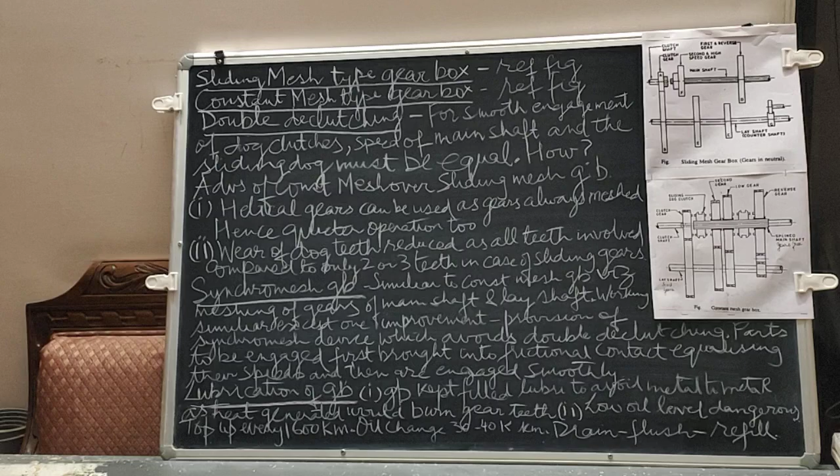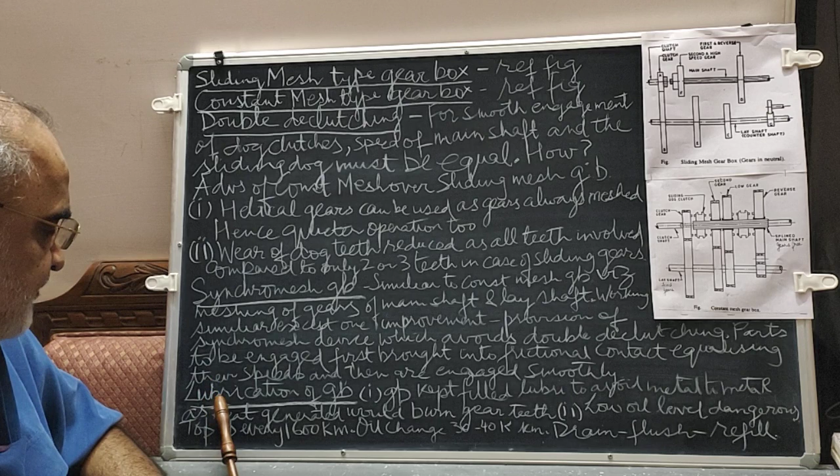Now we come to the type of gearboxes. These are sliding mesh type gearbox, constant mesh type gearbox, we understand double declutching associated with constant mesh. Then we will also see the latest, which is now being done, made and fitted, Synchromesh gearbox. And finally we see the lubrication and care of the gearbox.

Now sliding mesh type of gearbox shown here is the simplest type. Now we are inside the gearbox. There will always be two shafts. If you have seen an open gearbox in a workshop on the roadside, the top one will be the main shaft and the lower one will be called the lay shaft, or even some call it the counter shaft.

Now the gears with various sizes, number of teeth - this is important, which you will study later. Number of teeth, that's why the sizes are different. These gears are fixed onto the lay shaft. Two gears are mounted on the main shaft. The main shaft is splined, and therefore these two gears are free to slide on the main shaft.

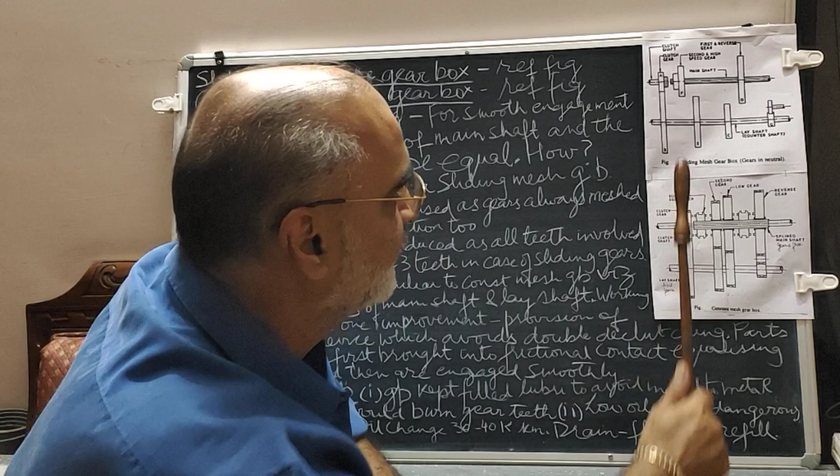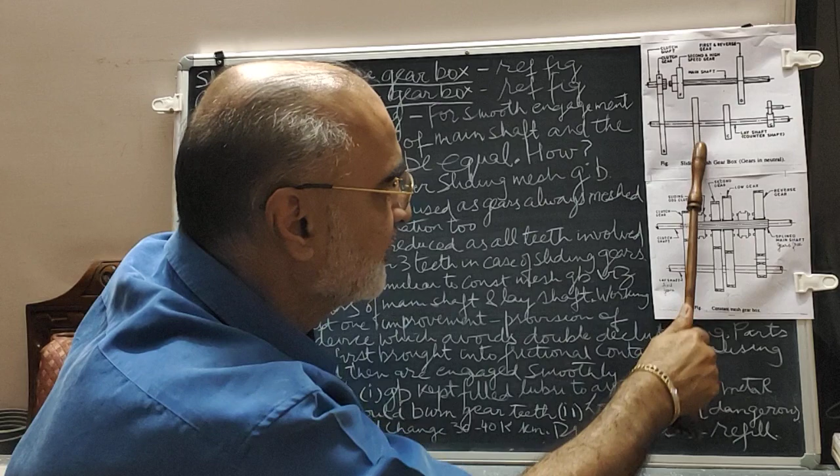Now we want to shift to second gear. We will press the clutch, disengage this and put it in second gear. What do we do in second gear? The gear lever mechanism will shift this gear on the splines and come in contact with this gear. How will be the power flow? From here, here, here, here and out of the gearbox.

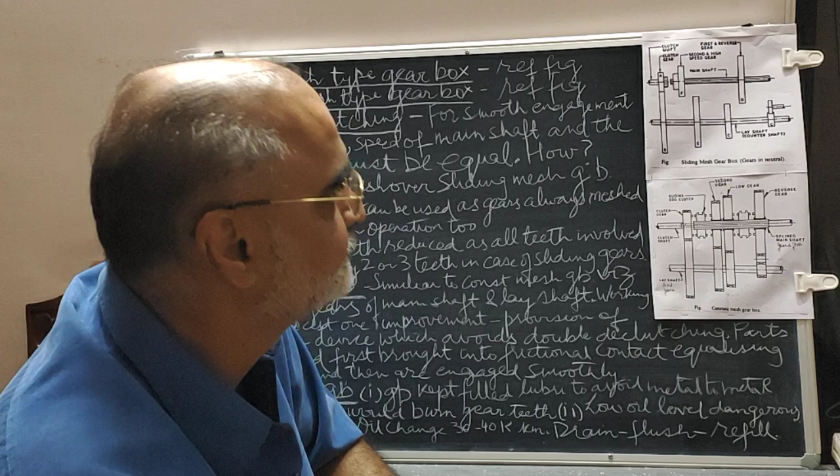Top gear, third gear or top gear. Press the clutch, remove this, and the clutch selector mechanism shifts this gear into the clutch gear. This is internally splined, this is internally splined also, and the drive is direct drive, which is the top gear. Direct drive - although this continues rotating, as I said, the drive will be this, there is no drive from here, and the drive will be straight.

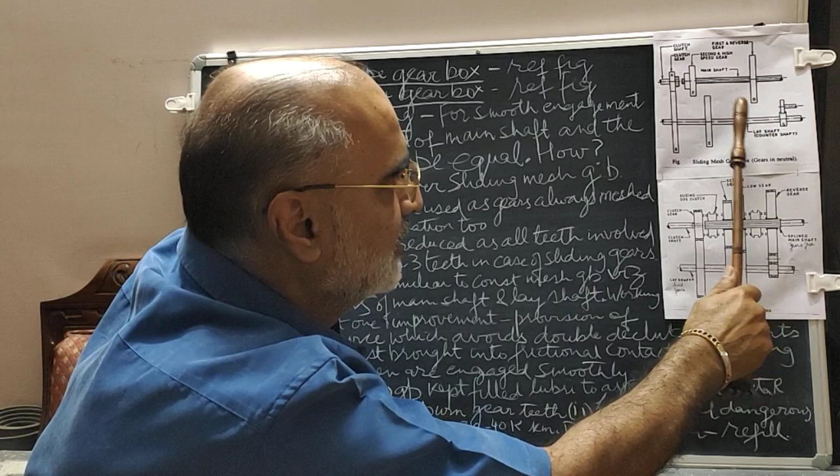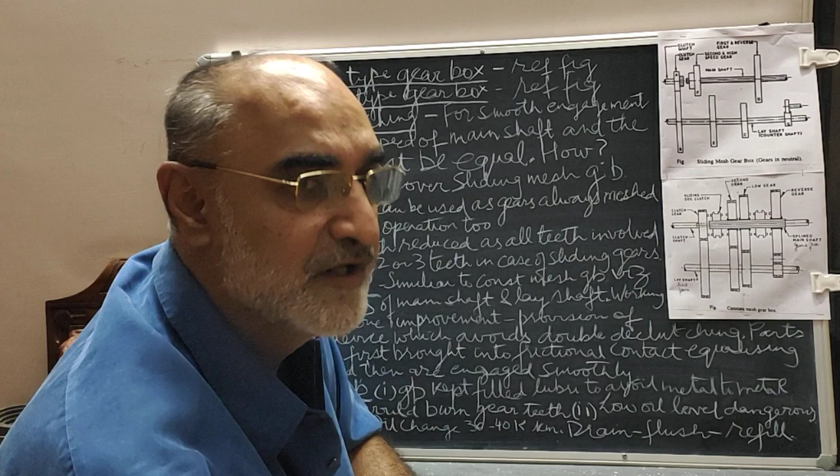Now what about the reverse? We have to move the vehicle in reverse also. For reverse, this is the first and reverse gear, shifted to the right. The difference is that between this gear and this gear there is an idler gear. The idler gear, what is the purpose of the idler gear? It is to turn the direction of rotation. If it was going clockwise, the idler gear will make it turn anti-clockwise. Earlier semesters must have learned to turn the rotation - you put an idler, it will rotate.

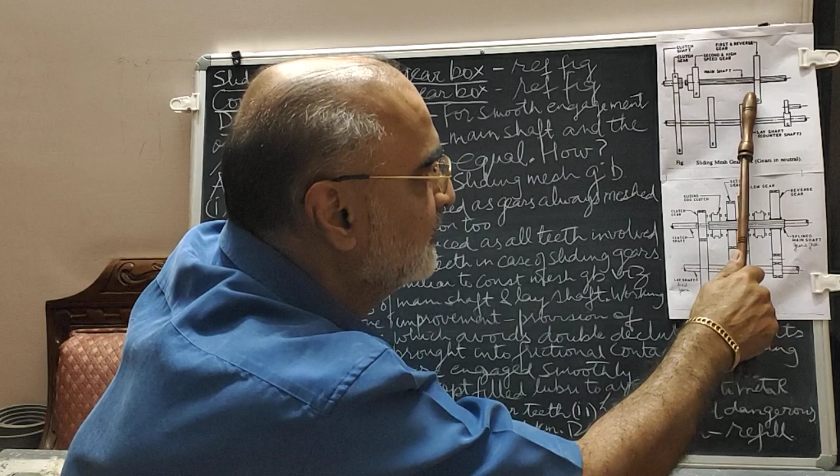So what will be the power flow? It comes from here, through the idler gear. This will reverse the direction of the main shaft, and the main shaft, instead of clockwise, will start rotating anti-clockwise, and the vehicle will move backwards.

What moves? The main shaft is for the movement of these sliding dog clutches. Now there are two sliding dog clutches - if you have 3 gears, there will be 2 sliding dog clutches. Clutches are these small things which come first into frictional contact and then they contact that particular gear. So the gear shifter mechanism is fitted onto these, and when you shift it, only this moves left. These don't move, these are fixed to the gears below. This will move left or right, this will move left or right.

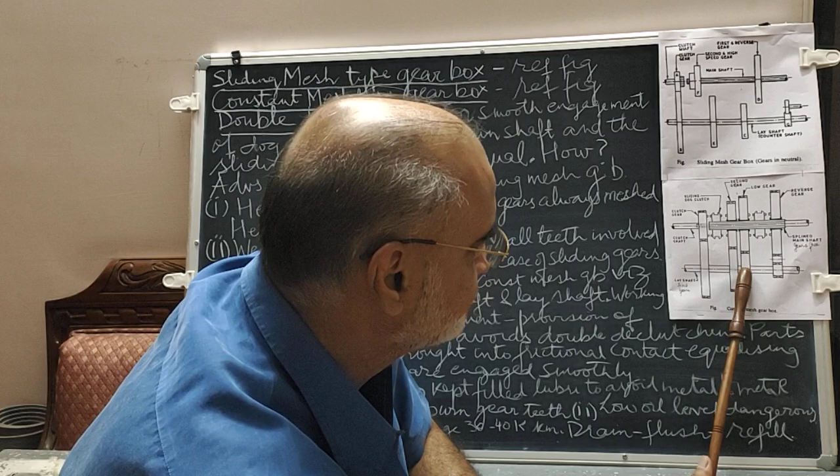Now let us look at the first gear. The drive comes this way, same as that, onto the lay shaft, and for the low gear, the right dog clutch is moved left and making contact with this, and so the power will flow. Now this is the low gear, first gear.

Now we want to shift to the second gear. We press the clutch, this gets disconnected, and the gear selector mechanism - we shift the left dog clutch to the right. This contacts this, and the power flow will be - this is the second gear power flow.

For third gear, same as that. You press the clutch and then engage the gear selector mechanism to top gear. This dog clutch will be moved left, and these clutches will engage, and the drive will be direct. As in that, this will also rotate, but there will be no flow - there will be a direct flow for the top gear.

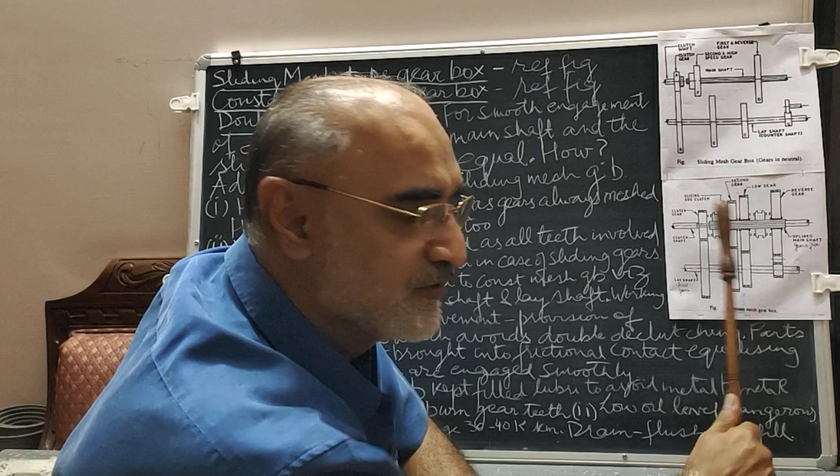For the reverse also, it is the same. This is the idler gear, and the direction and rotation of the main shaft will reverse, allowing the vehicle to move in the reverse direction.

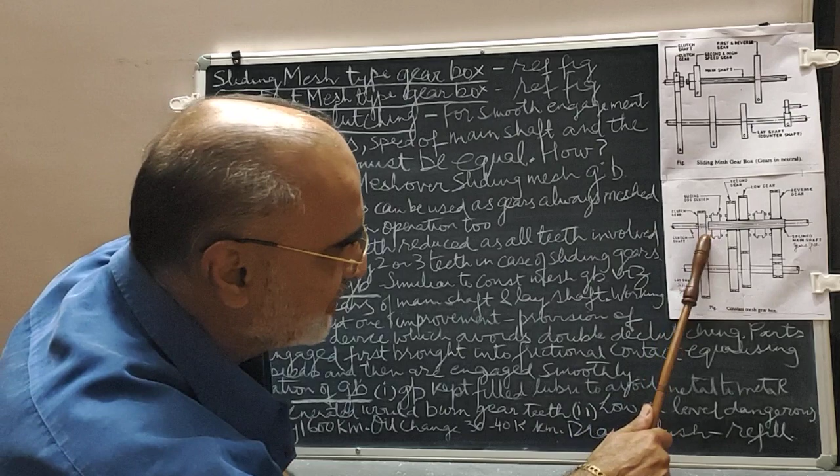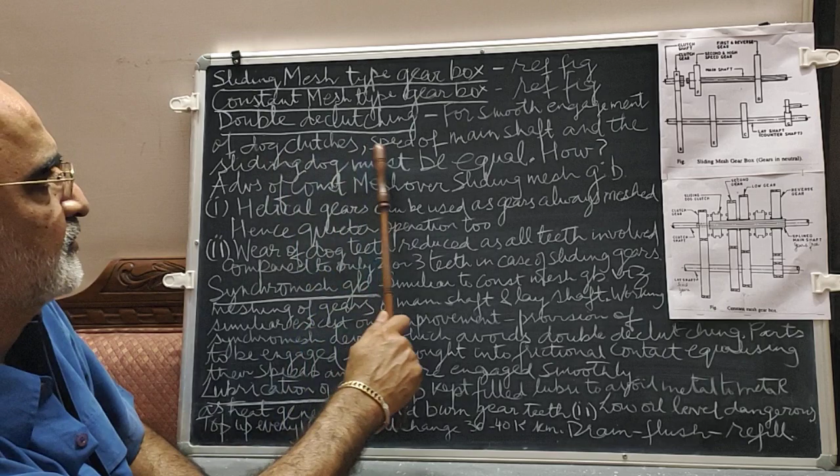Now what is double declutching? For smooth engagement of these dog clutches, we must synchronize and try to bring the speed of the main shaft and the dogs as nearly close as possible to avoid friction and noise. The speed of the main shaft and the sliding dog must be equal. So how do we do that?

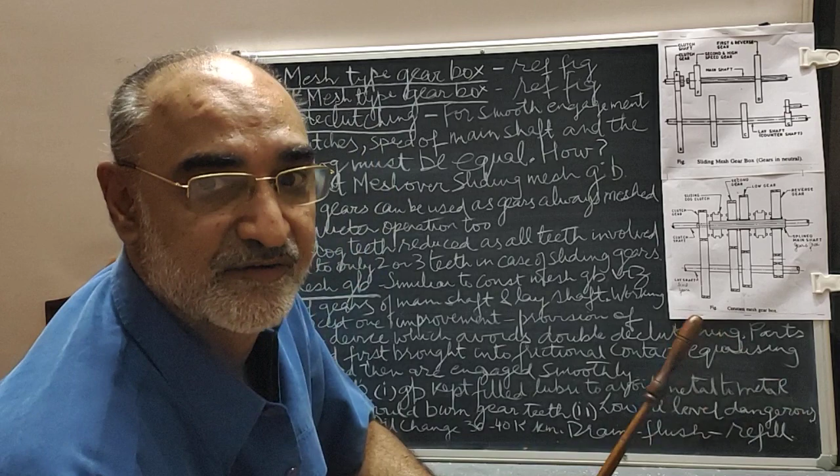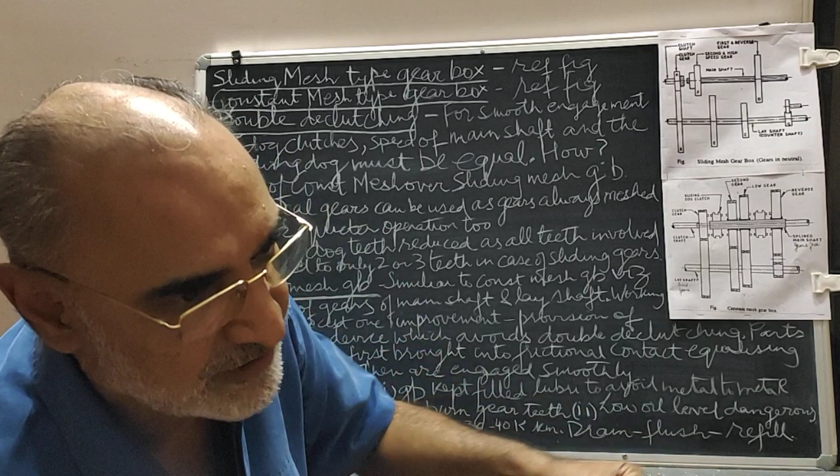We do that by double declutching. What happens is we press the clutch, bring it to neutral, press the accelerator with the right foot to increase the speed of the main shaft to that of the dog clutch, so that both can engage, and then again we engage the gear and release the clutch. This is called double declutching, so the speeds should be the same to avoid any noise or friction.

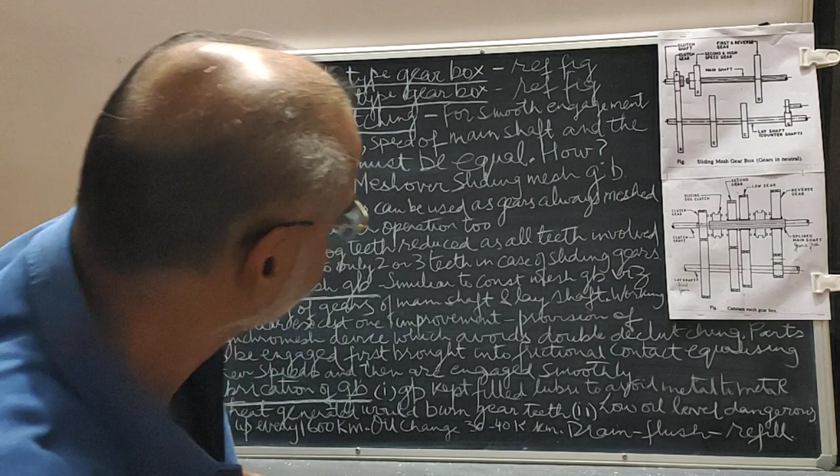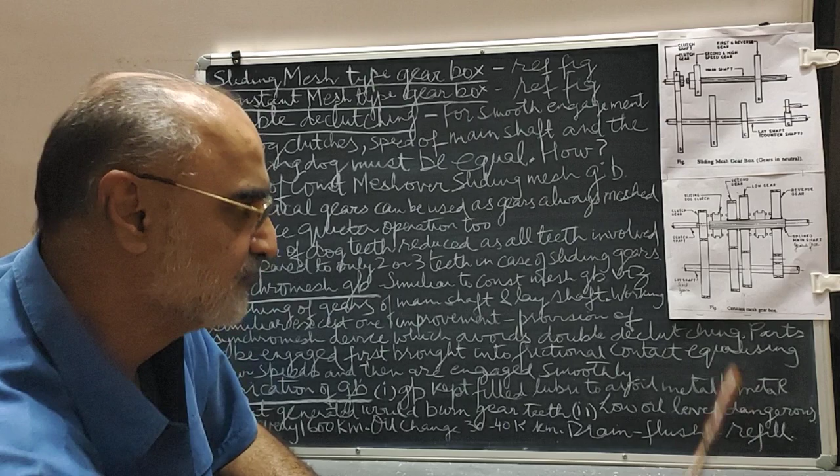Now let us look at the advantages of constant mesh sliding over the sliding mesh. This sliding mesh, I think production has stopped totally, and this is also limited quantity now. The latest is of course the Synchromesh gearbox, which is a slight improvement over this. But we must know the concepts theoretically.

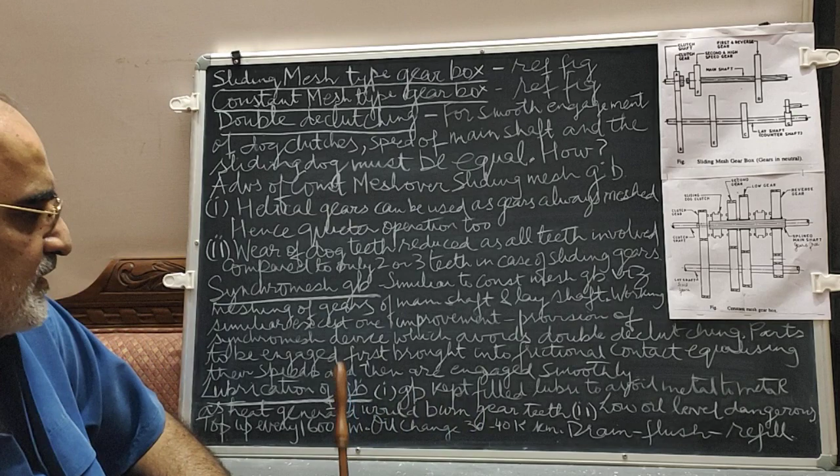So the advantages of constant mesh over sliding mesh are: first, you can use helical gears because the gears are always in mesh. As we studied in earlier semesters, helical gears are less noisy, hence quieter operation too. The wear of the dog teeth is reduced as all the teeth are involved, compared to only 2 to 3 teeth in case of sliding mesh.

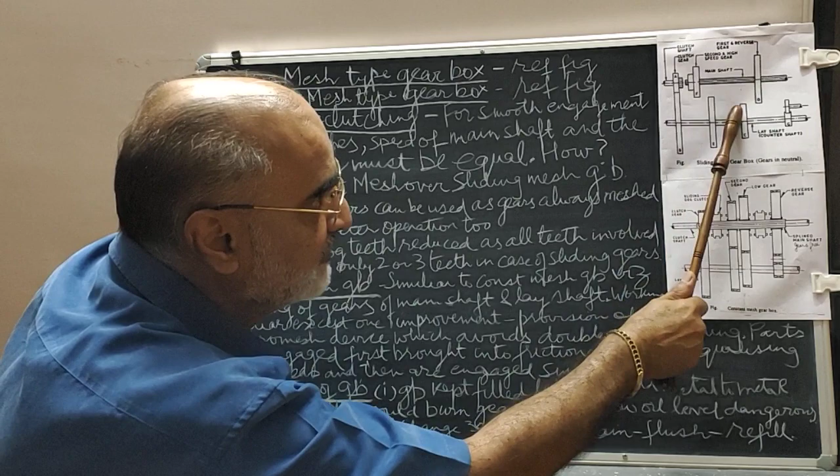In sliding mesh, only 2-3 teeth come in contact whenever you engage them. In constant mesh, these teeth are always in contact, only the dog clutches are functioning in this place. So the wear of the dog teeth is reduced as all these teeth are already meshed, resulting in less wear.

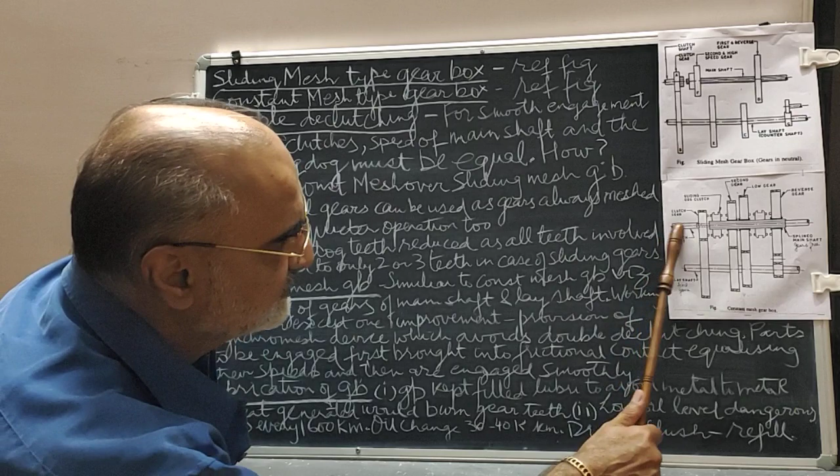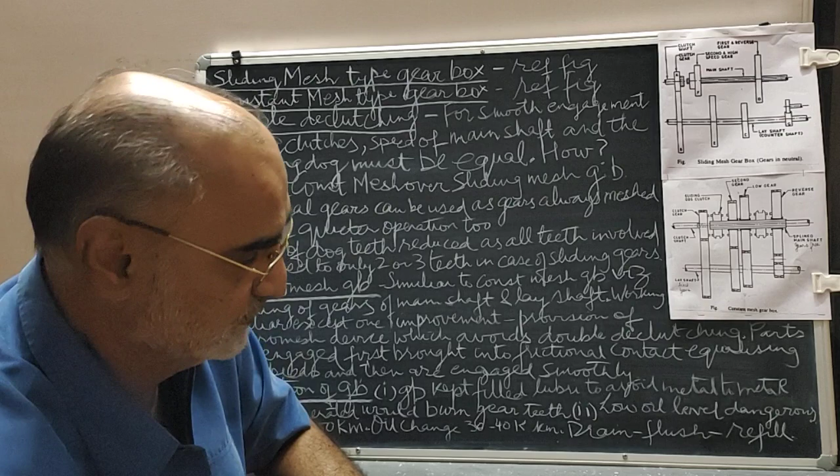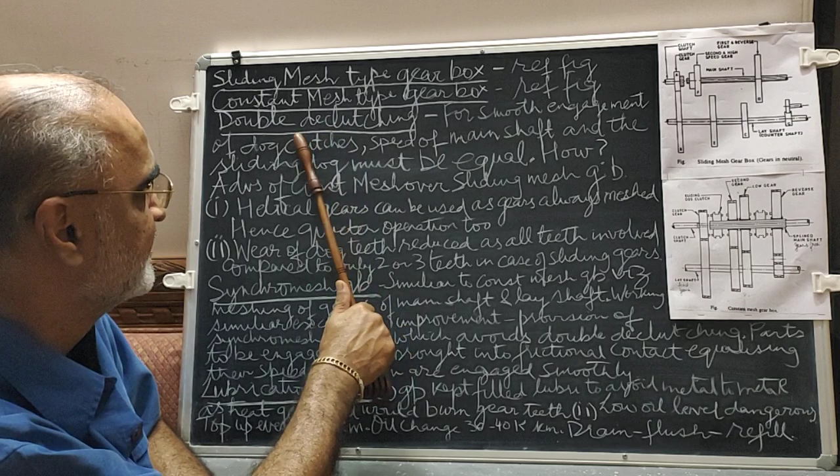Now the Synchromesh gearbox is an improvement over the constant mesh gearbox. The construction is similar, we have a main shaft which is splined, and the lay shaft and fixed gears are the same. The only addition is a Synchromesh device. What is the purpose of that device? All it does is avoid double declutching. The job which we physically do in double declutching is done by the Synchromesh device. We will study this later when we come to the detailed study of the gearbox.

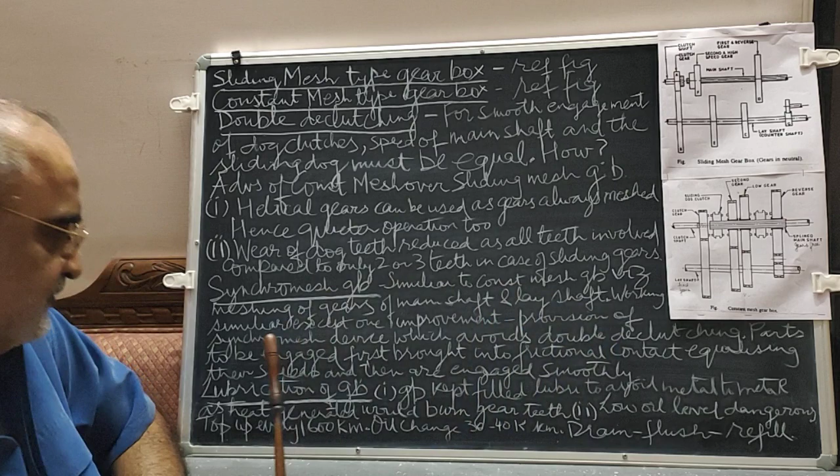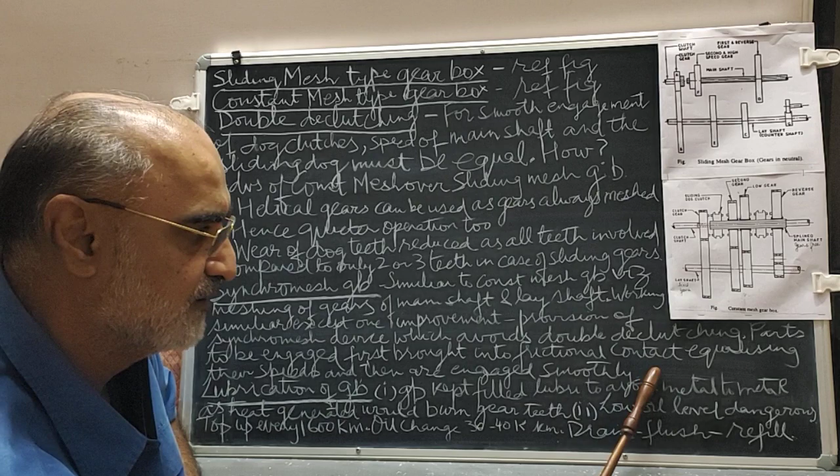Similar to the construction of the constant mesh gearbox, with meshing of gears of main shaft and lay shaft same. Working is also similar, except for one improvement: the provision of a Synchromesh device which avoids double declutching. The parts to be engaged are first brought into frictional contact, equalizing their speeds. Once speeds are equalized automatically, which we otherwise do manually in declutching, they are then engaged with the gear lever. First the Synchromesh device works, and once the speeds are matched, the gear selector mechanism, through the gear lever, engages that particular gear.

Now, lubrication of the gearbox - this is important, so let me cover some relevant points which should be known. First, the gearbox should always be kept filled with lubricant to avoid metal to metal contact.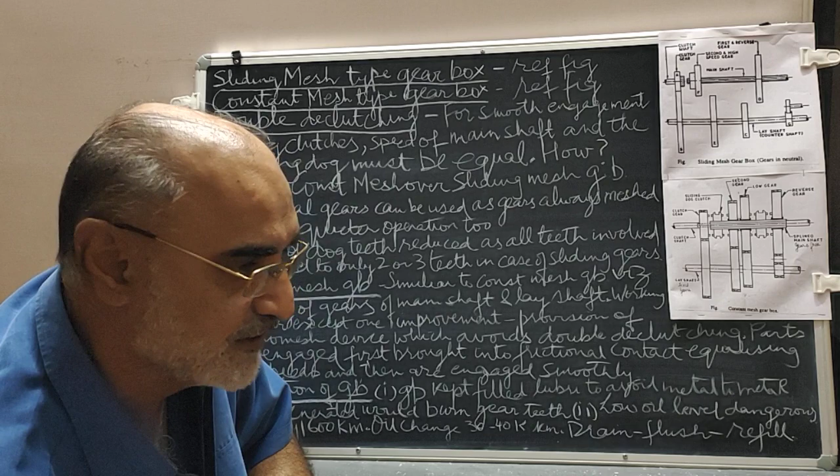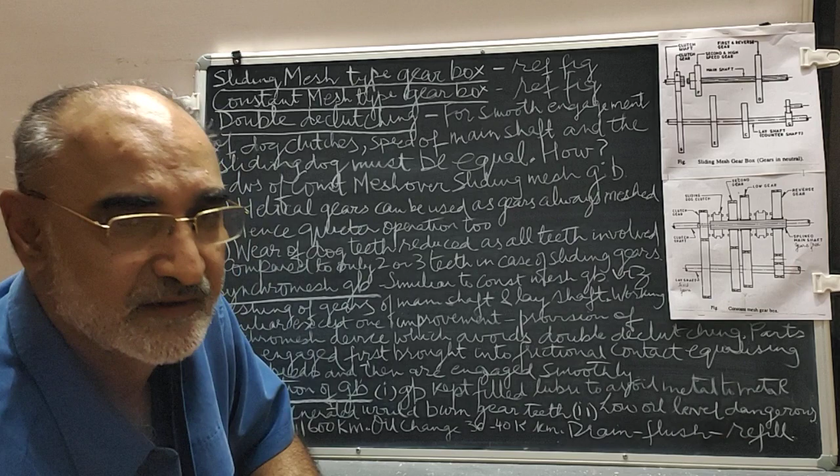Metal to metal contact - as we studied earlier, there is always a thin film between two gears when they are running because the gearbox is full, and that is the lubrication required. If that is not there, no oil, the meshing of the teeth will cause the gear teeth temperature to rise very high and the gear teeth may burn out. So, to avoid metal to metal contact, as heat generated would burn the gear teeth, even a low level is dangerous - partially it may take longer, but eventually the gear teeth will burn out.

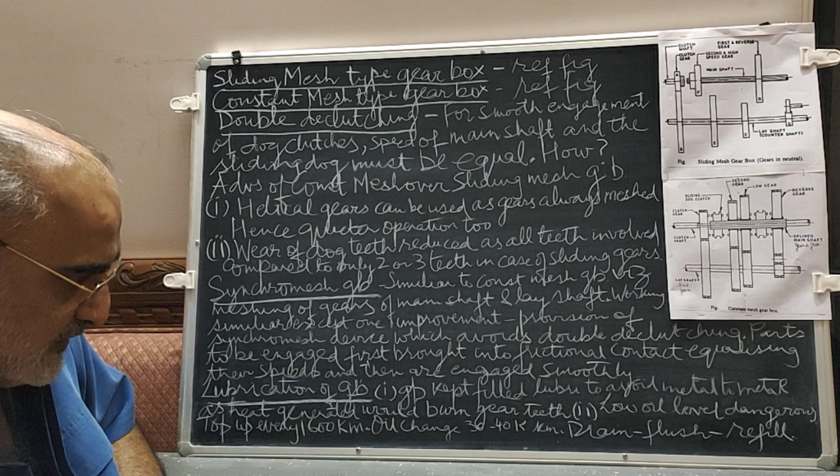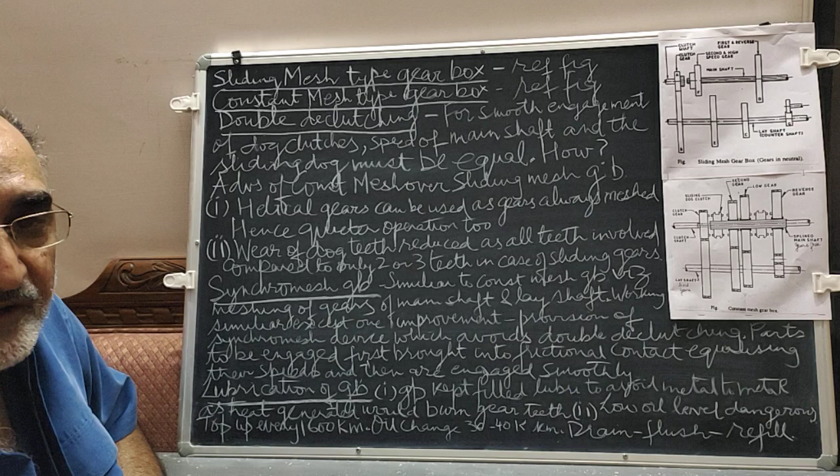So we need to top up every 1600 kilometers - this is for older vehicles, now of course kilometers have increased. Oil change must be done every 30 to 40,000 kilometers. Nowadays in modern cars, it's anything around 60 to 80,000 kilometers. In some cars, like my car, a Ford Fiesta, they say there is no need to change the gearbox oil at all during the entire service life, unless there is a problem, then only the gearbox is opened and the oil changed. Otherwise, no need.

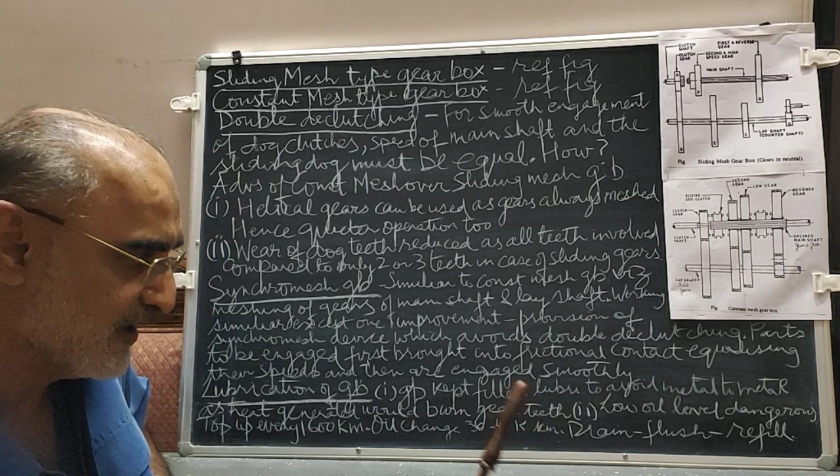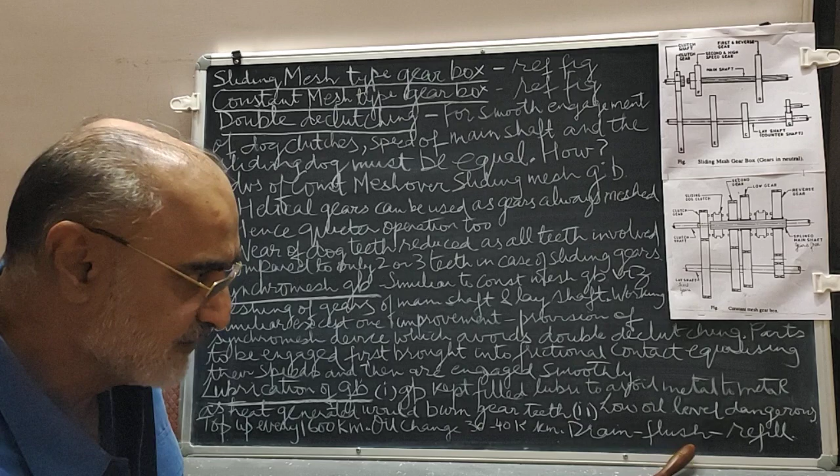So the procedure is drain, flush and refill. With this we finish this lecture. In the next lecture we will go to the next topic as per your syllabus. Thank you.